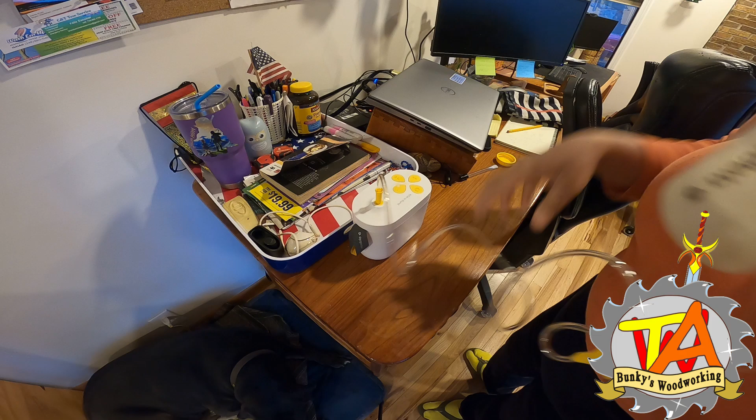About a year and a half ago, my wife and I were blessed with a beautiful baby boy. With the new motherhood and duties that come along with it, not to mention being a working mother and having to pump during work hours, I was struggling to pump the milk for the baby.

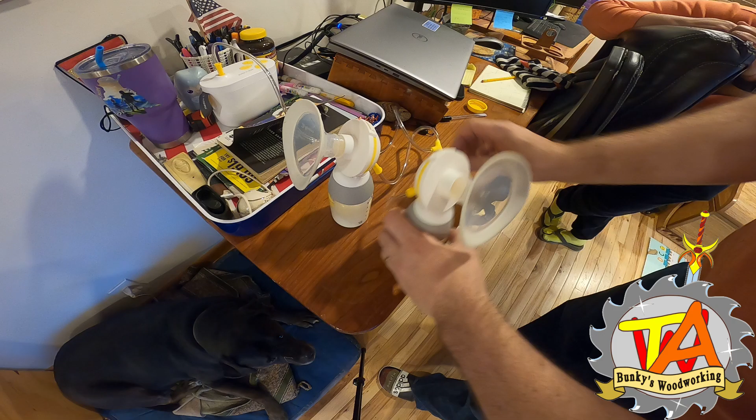My main struggle was with the bottles that came with the pump and the hoses connecting to it. A lot of milk was spilled due to the poor design of this equipment. These bottles can be a little broader at the base so they don't tip over easily. My wife being an engineer and me being a DIY woodworker found many annoyances that could be simply corrected with just a little bit of engineering.

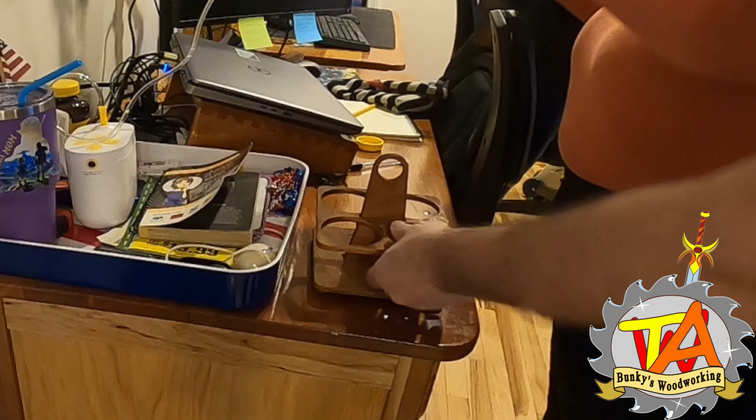So as you could see in that little video, I'm going to have to make something so these breast pump bottles don't fall over.

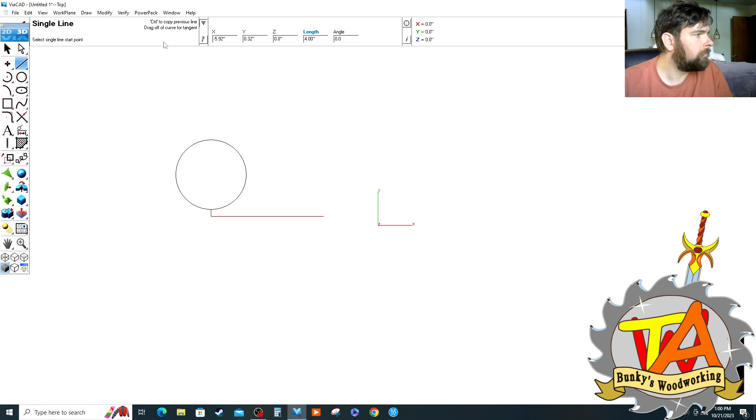I take the diameter of the bottles and I create circles in ViaCAD. This is one of the projects that really shows how nice it is to have a laser engraver. This whole project was done in one 24-hour period.

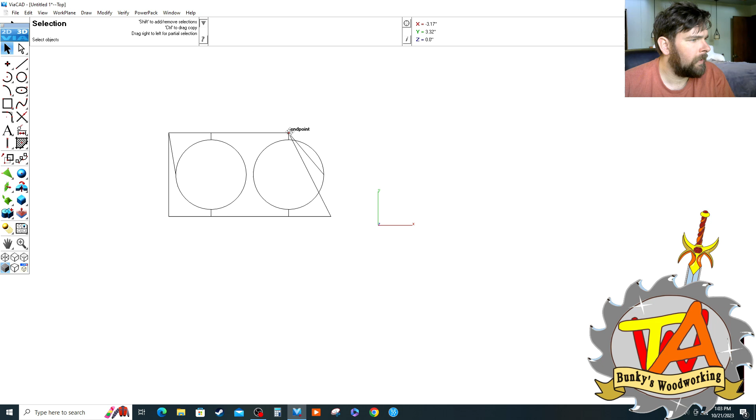I was originally just going to make a 2-bottle holder, but I decided I wanted a wider base, so I expanded it to 4 bottles.

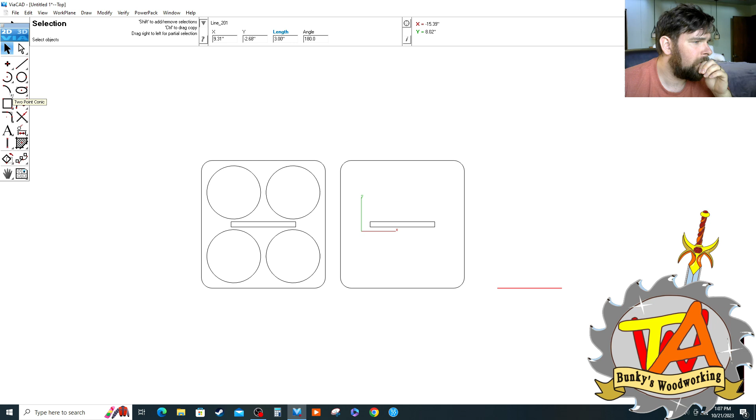I need to make this 2 levels: one level that would be flat, that can support the bottom of the bottles, and one with holes to hold it steady. And I need a center column that is tapered with small nubs that will stop it from falling all the way through. That center column has to be a little taller than the maximum height of the pump bottles. I plan to make a little ring or a hook so that it can be carried from the top.

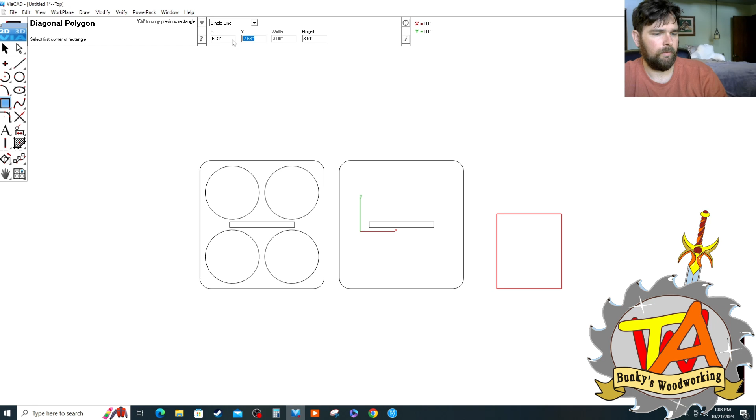After taking measurements of the bottles, I put it into the design. So for the center column, I start off with a little square and I make the little nubs. The square is the maximum length of the smaller hole on the bottom of the tray.

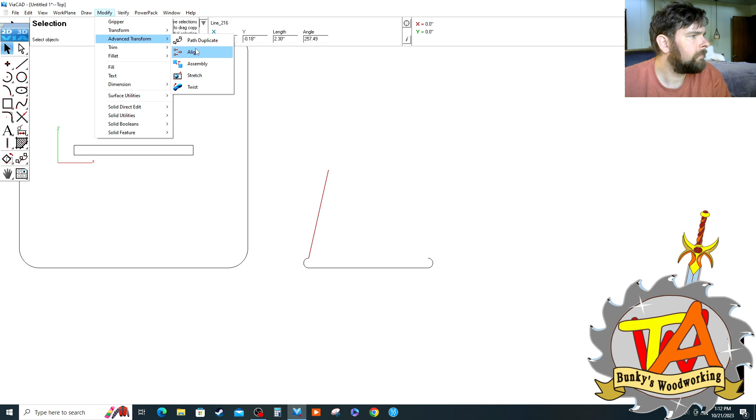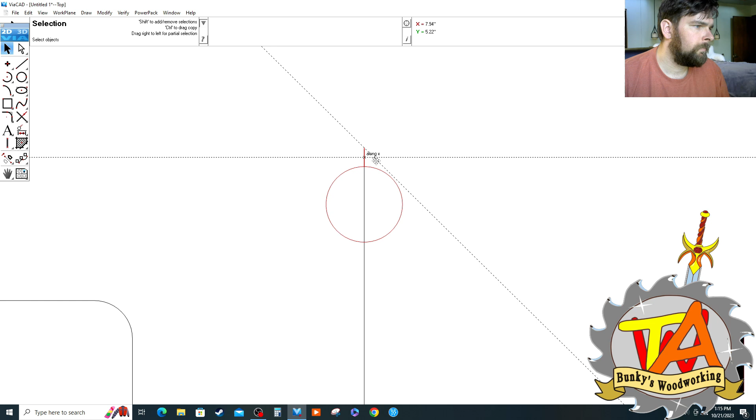Now I taper the top of this column and add 2 more nubs so that the top part of the tray can be held in. I created a top ring to about the size that I wanted it so it wouldn't interfere with the top of the bottles, and again I tapered the section to the top of the ring and adjusted the size.

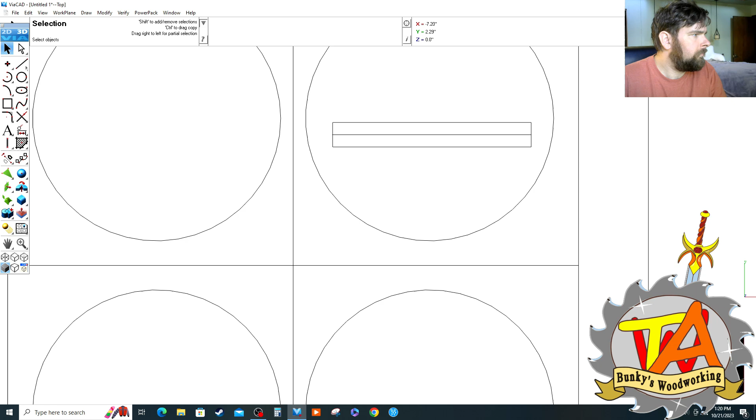I adjusted the top level's cutout to correspond with the top part of the column. I added 4 circles to act as feet, since the bottom of the tray would have the bottom part of the column sticking out. I decided to add them to the center of the circles already cut out, just in case I wanted to make a car with the wheels later.

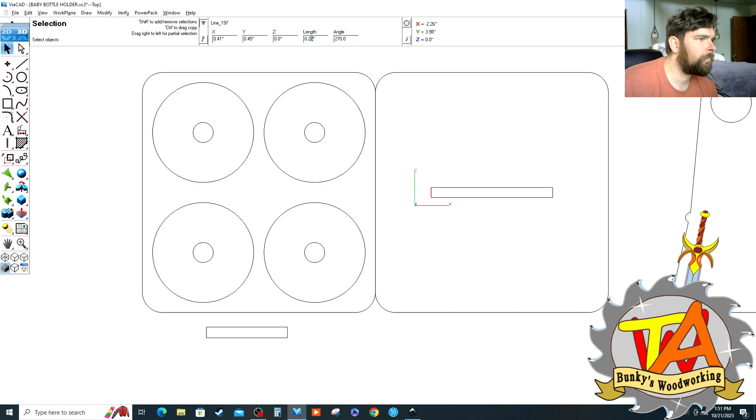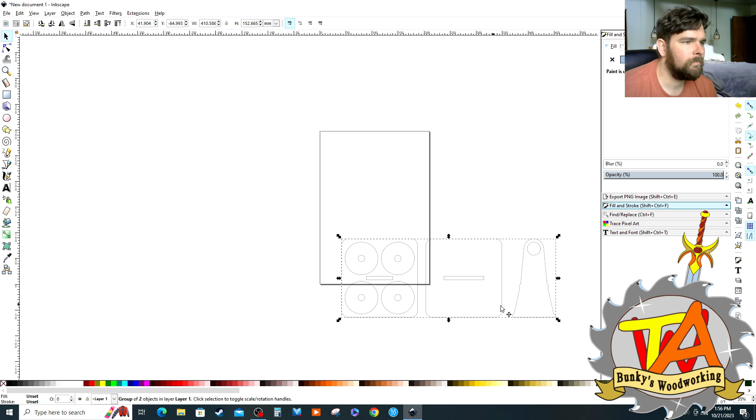We're going to be cutting this out with a laser engraver, so I made some necessary adjustments, like deleting unnecessary lines so the laser engraver wouldn't go over that area twice. Now I export this file and move it into Inkscape, and I change the stroke path to 255 red. This allows my laser engraver to read it as a cut value.

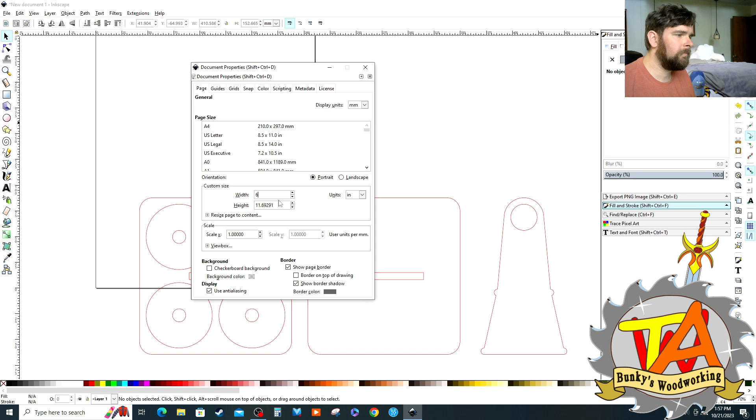I'm using some scrap lumber that I resawed by going to document properties and setting the custom size, making sure everything will fit on that scrap piece. This changes the size of the black square in the background, and any object outside of this area causes issues with my laser engraver. It looks like this one barely fits, so I'm going to have to move things around.

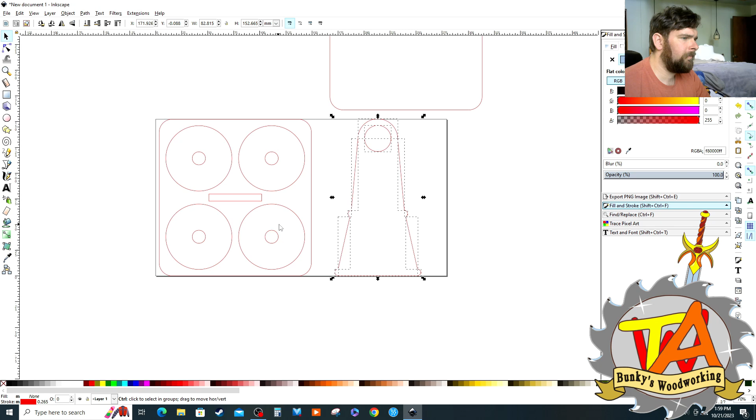So I'm going to save one file with 2 cutouts, and one other file for the bottom cutout so I can use up this scrap lumber. I usually save the files like part 1, part 2, and they're saved as SVG files.

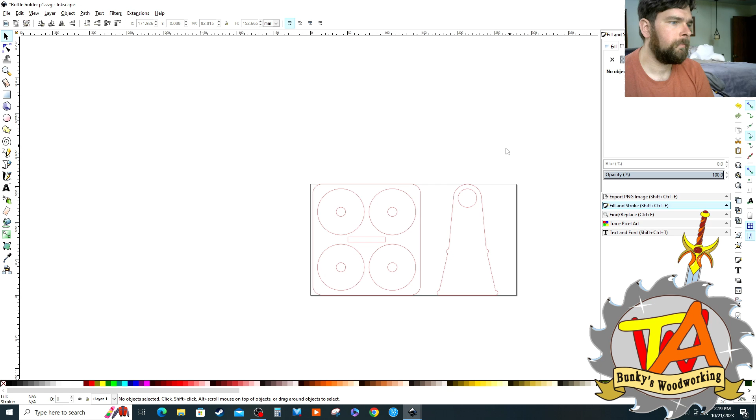And now we're ready to cut.

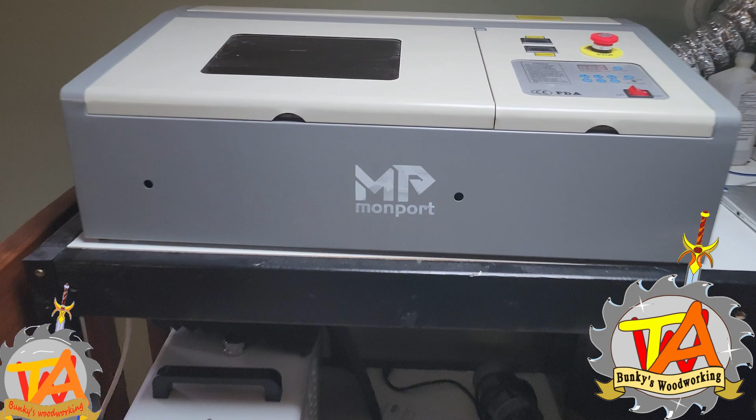I placed the workpiece inside of the laser engraver to start cutting. I use the vector cut setting, with the laser engraver power level set to around 12. The wood I'm using is a quarter inch thick, so it will take several passes to cut out the final product.

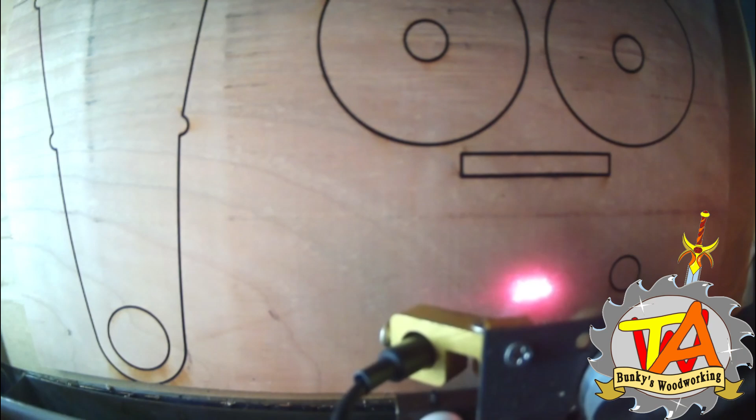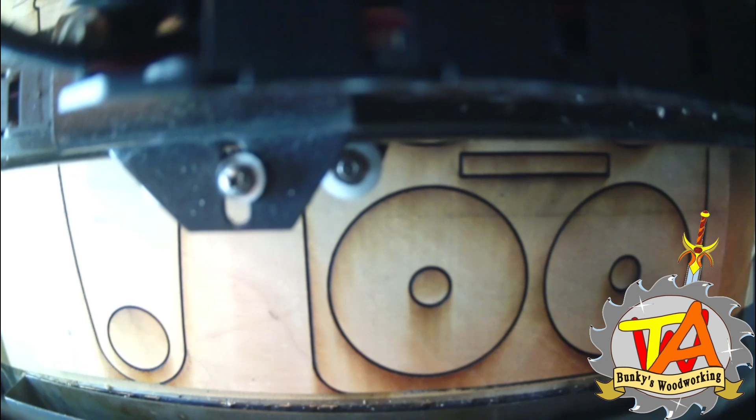So here it is, me breaking it out of a piece of wood. Having a home laser engraver is an amazing thing. I can start off with an idea, design it, and cut it out all in one day. And if you design these things right, they fit together just like a puzzle piece.

Now I need to go ahead and cut out the last piece, starting with the vector cut setting.

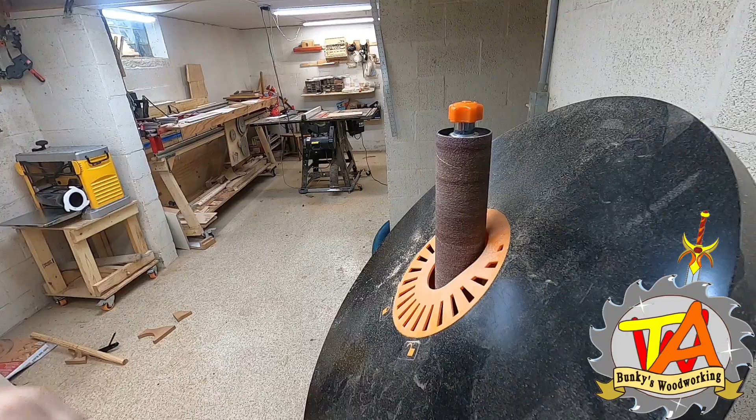Now we have the final piece, and I can go downstairs and clean it up. I use my new favorite tool, the spindle sander, in order to get any of the charred edges, and to soften any of the edges with a small chamfer.

One of my biggest complaints on laser engravers is that it leaves a small charred edge, so there's a little bit of cleanup that is required. I find myself using the spindle sander more and more for each project.

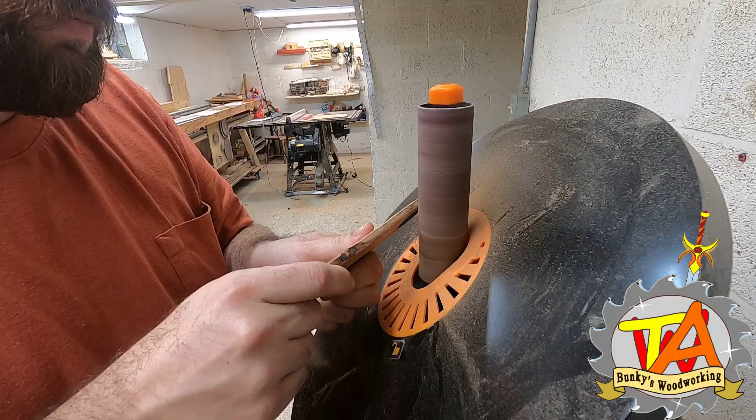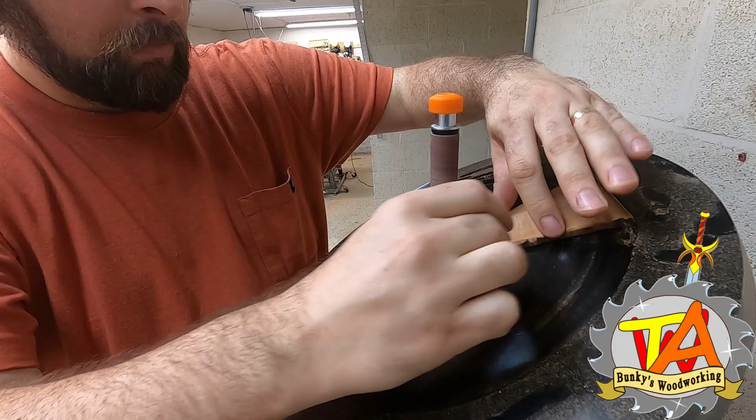Now it's time to do a dry fit.

I absolutely love this. It's one of the more perfect projects that I've ever done.

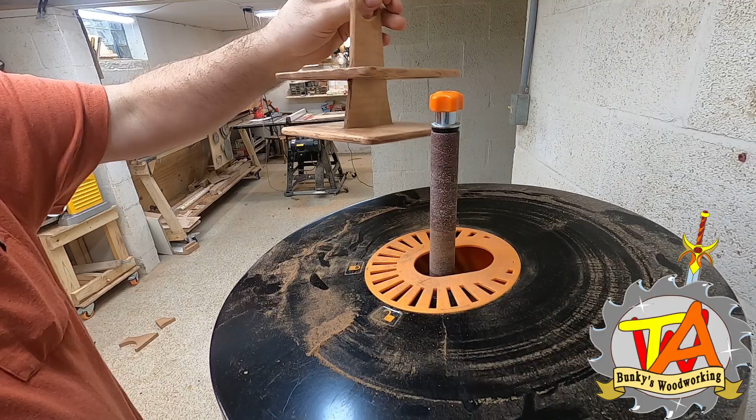After everything is sanded down, I take everything over to the table saw and start assembling with CA glue and accelerant. I would normally be using wood glue for this project, but I really want my wife to be able to use this immediately.

Now that everything's glued together, I can add some clear polyurethane. I do 2 to 3 coats on this project with sanding in between, allowing 4 hours to cure per coat.

And now you see it, the final product. That made my life a lot easier, less stressful, and less emotionally taxing.

This was a long time coming video since it was very personal to me. And while my wife was experiencing so many issues, it was a relief to me that I can design and create something to take a little bit of the stress off of her shoulders.